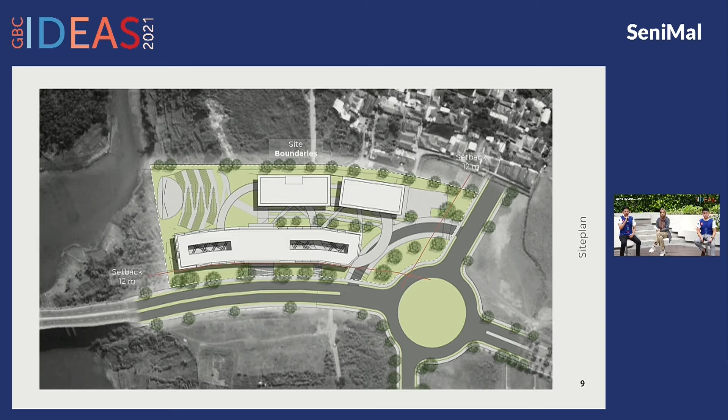Next, please. This is the basic site plan of the design. As you can see, the design has a very minimal entrance for motorized vehicles, seen on the furthest right side, where there's only one single loop functioning as a drop-off, whereas everything else can only be reached by pedestrians via walkways. Next. This is the project data. Next.

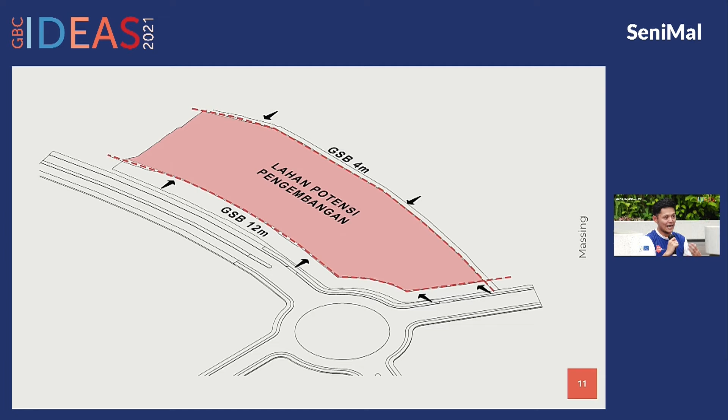So this is how we look into the design and how we develop it. First, we look at its setbacks from each side, and then we get a basic form for developing this design. Next. From there, we create two masses, one on its northern side and one on its southern side, where the shape is a response to the sun path.

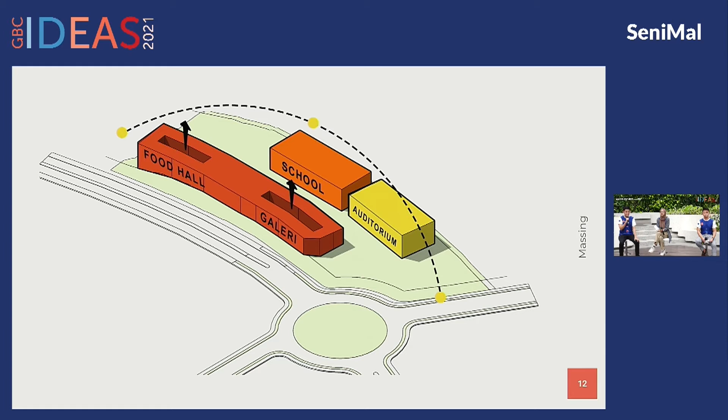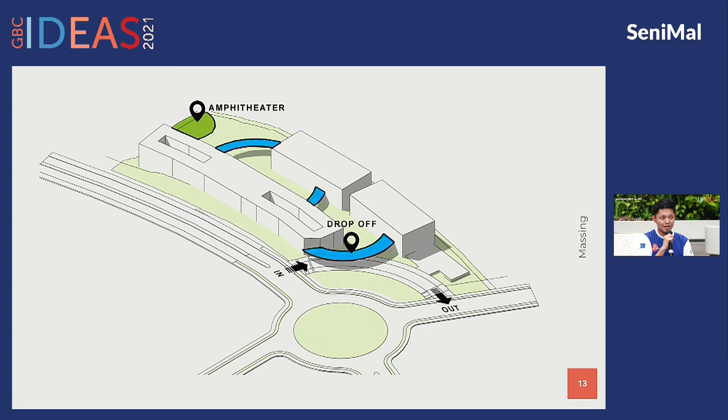Next. On top of that, we create a connection by presenting a drop-off that also functions as a sky bridge connecting the southern and northern buildings, as well as providing an outdoor amphitheater on the furthest western side. Next. And we get our final design, which roughly looks like this. Next. For its program, as said before, it mainly consists of public, office, exhibition, educational, and commercial, where the southern building is mainly used for public, whereas the northern side is used for semi-private or educational purposes. Next.

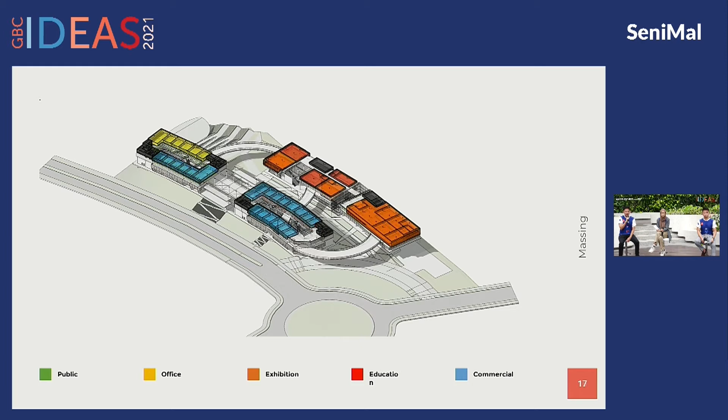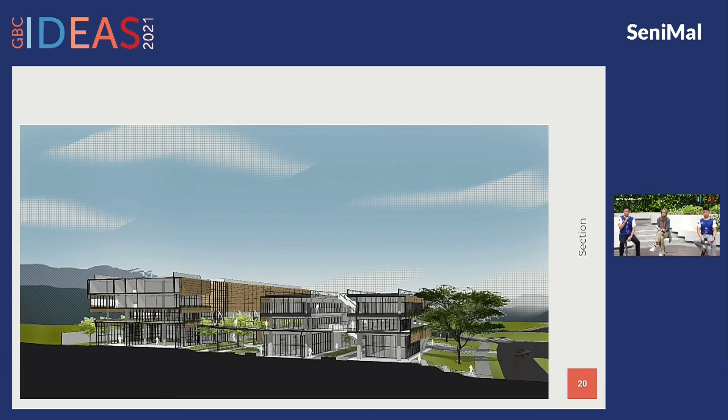As you can see, it's also implemented in the other section, where the northern side of the building is slightly higher than the southern side. And because of its mass, we also provide a single void in the middle of the southern building to increase light as well as ventilation. Next.

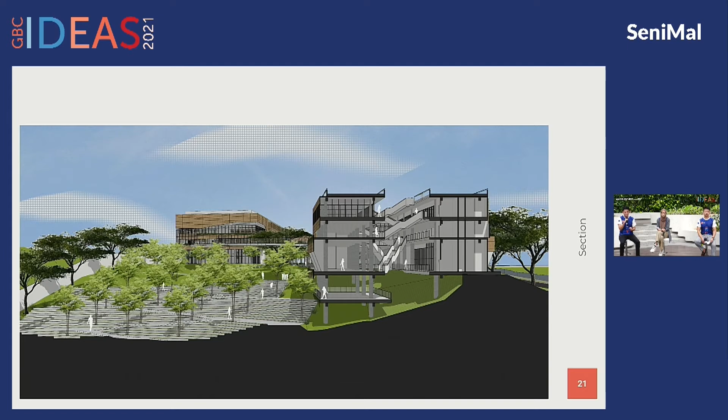This is also an overview of the amphitheater. On that topography, we add ramps as well as stairs to provide a landing for both pedestrians and disabled people who want to view it. As you can see on the southern side of the building, each level has an easy view towards the amphitheater, so even if there's an exhibition going on there, people in the building can also be part of it. Next. So these are the strategies. My friend will take over. Thank you.

And this is our strategies to enhance the design to reach the net zero energy healthy building. Next, maybe. Yeah, we have 5 strategies. At first, is massing. At the beginning, we do the placement and mass on the site oriented towards wind flow and solar path. And the second, we design the facade.

Implementation of building facade to maximize lighting and airflow. Then we choose low carbon footprint material, reducing material finishes and modular size application. And then we did active design through selection of low energy smart device. And the last one is, of course, renewable energy, utilization of abundant natural energy in Indonesia, such as wind and sunlight.

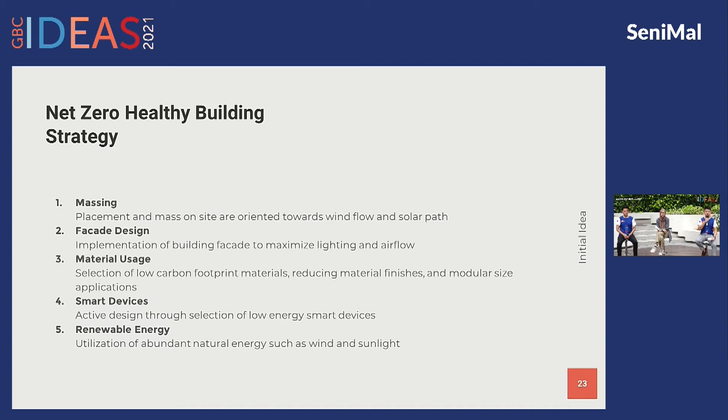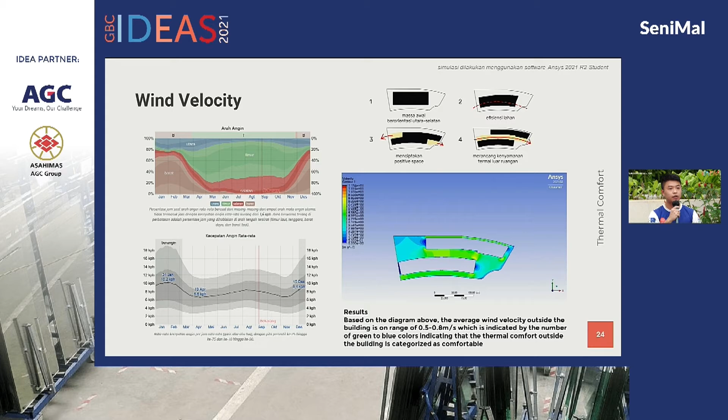Next. As you can see, this is wind velocity on the site. The average wind velocity outside the building is in the range 0.5 to 0.8 meter per second, which is indicated by the green to blue color, indicating that the thermal comfort outside the building is categorized as comfortable. Next. And then we did the facade design.

Padalarang has a climate that tends to be hot and humid, which encouraged the design of a facade that responds to the slope of the winter solstice and summer solstice, so that heat can be reduced and wind can be maximized to push humidity from the inside to the outside of the building. As you can see in the diagram on the right, winter solstice north, the altitude is 59.71 degrees, and the summer solstice south, altitude is 73.43 degrees. Next.

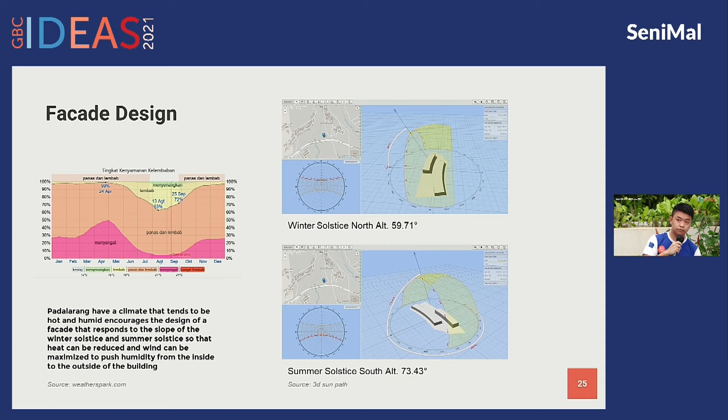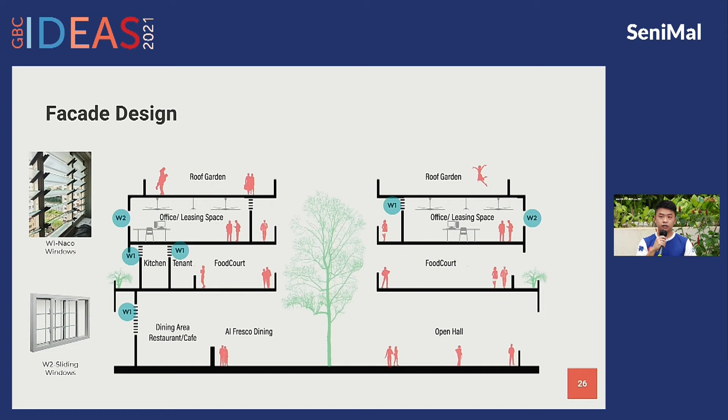As you can see at the section, most of the spaces are open, and certain spaces require enclosed space, like office, leasing space, kitchen and maybe library. We provide them with sufficient ventilation through Naco windows and sliding windows. And this is our wind velocity simulation inside the building. Based on the diagram, average wind velocity which passes through the building is in the range 0.56 to 1.2 meter per second. Next.

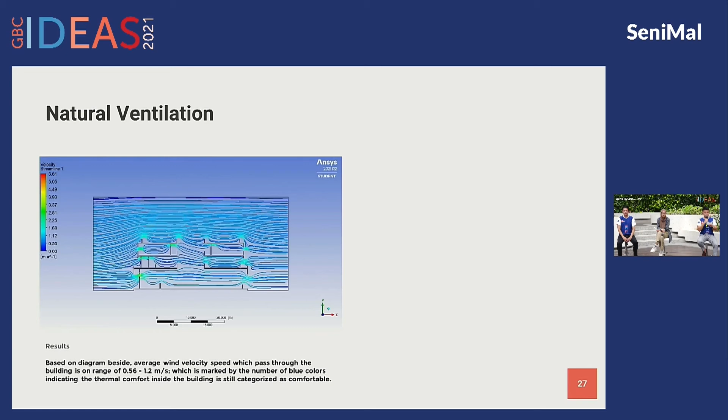From facade design, we did the simulation with a typical modular grid building, and within 8 a.m. to 4 p.m., average lux from daylight is about 260 lux, and it meets the requirement of most of the spaces, except certain spaces that require a high minimum lux level, like library, offices, kitchen, and handicraft room.

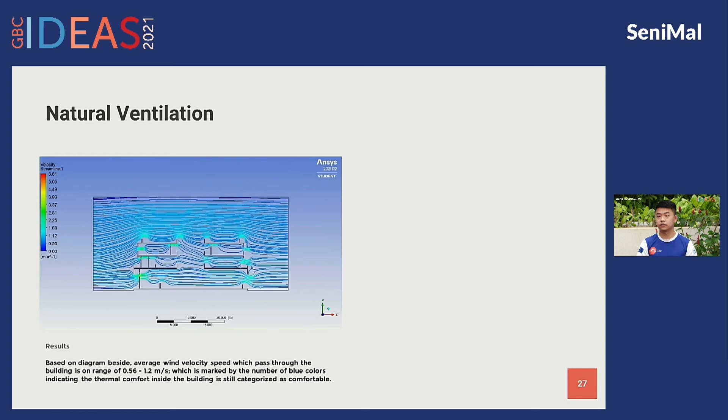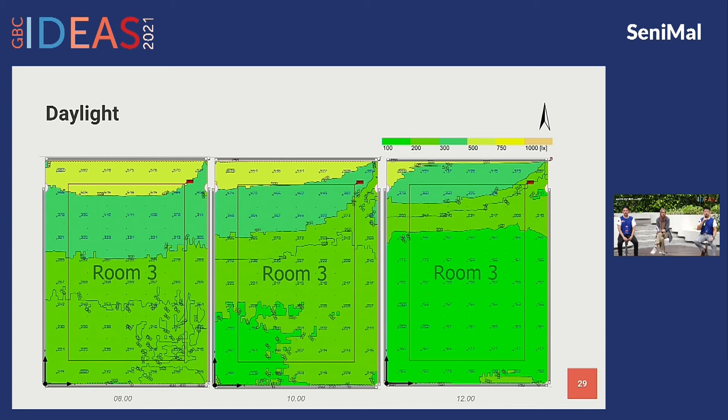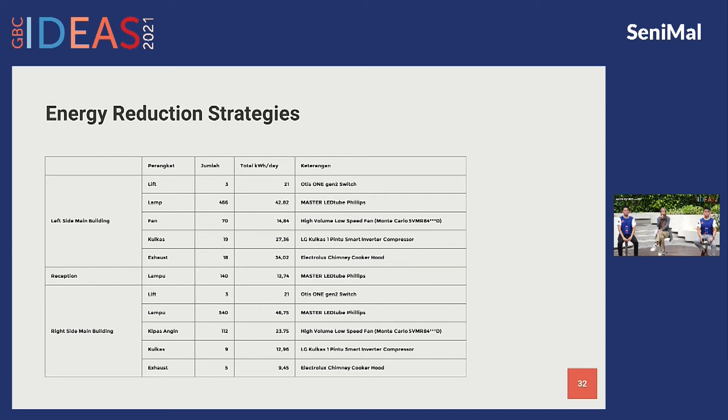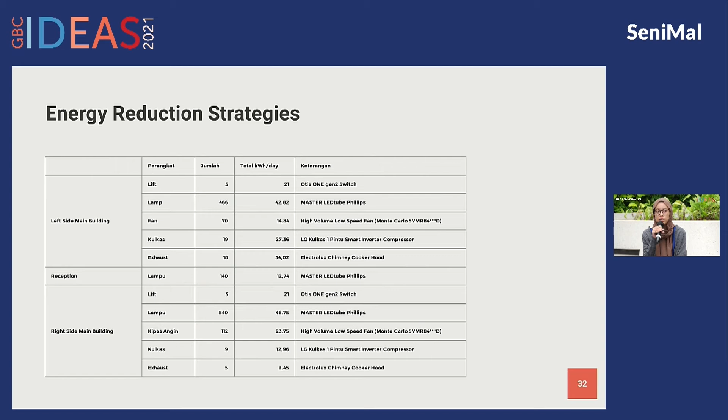So after we designed the passive design strategies, we maximize our energy efficiency by using smart device strategies. As we can see from the table, we try to specify each room's requirements, and then we use smart devices to accommodate the needs. As we can see from the site, the wind speed is low, so we achieve thermal comfort by using large low-speed fans, and we use air conditioners for specific rooms such as the recording room and auditorium, which need to use VRV as well. And next.

And for the lux requirements, we adjust by using the appropriate number of lamps so that it can support the activity of each room. And for the vertical circulation, SeniMal uses stairs as its main vertical circulation, but we also provide energy efficient lifts for the disabled so that the design can be more inclusive. Adding up the energy from all the lists above, SeniMal building energy consumption is about 457 kilowatt hour per day. Next.

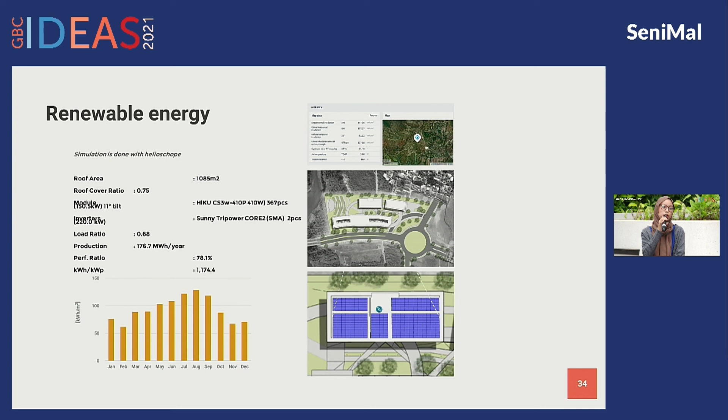To provide the energy requirements, we use solar energy, solar panels, as its alternative energy source. So we use HelioScope for the installation simulation, and we use the data from Global Atlas, and we iterate the degrees so that we can conclude that 11 degrees is the best degree to maximize its energy intake. From this renewable energy installation, we can have about 176.7 megawatt hour per year. Next.

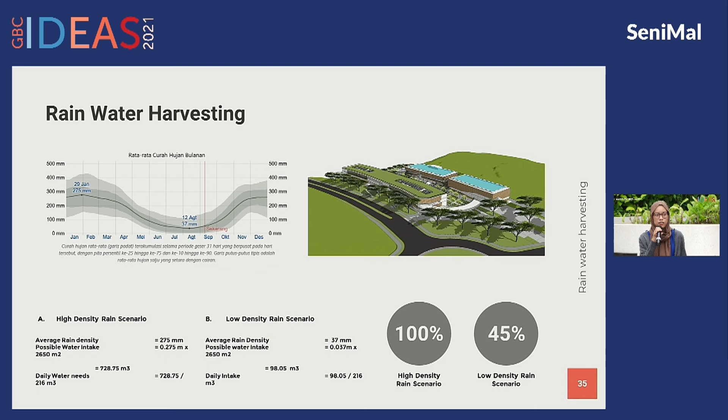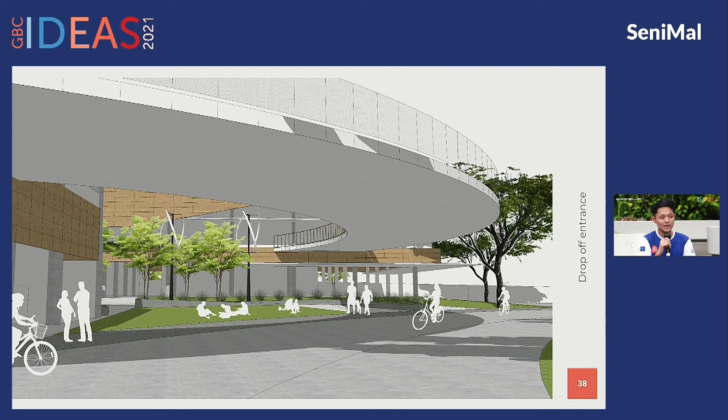Next. Okay, so from here, I guess we would like to look at the design expression. So next, please. For the first view here, we provide you the drop-off entrance, where the drop-off is actually in the form of a sky path or a skywalk. However, the form itself becomes a cover for the drop-off and therefore becomes an interaction space as well as an inviting space. Next.

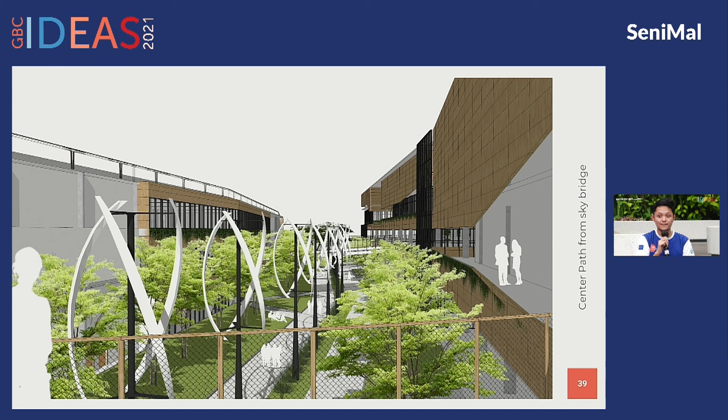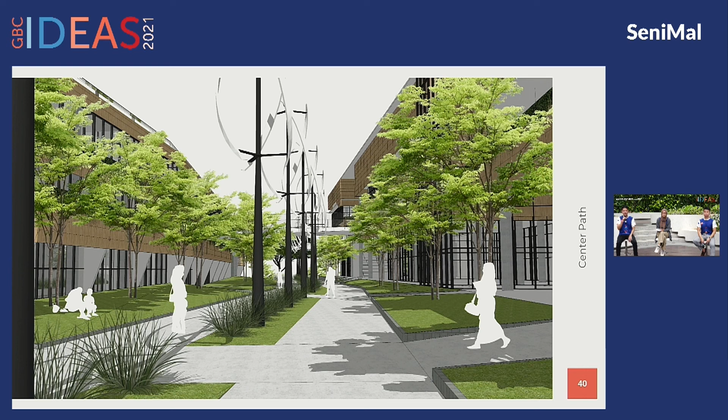From here, we can see from on top of that bridge that the middle corridor of the area is provided with lush vegetation as well as several vertical axis wind turbines, which can also provide some renewable energy to the design. Next. Okay, from here we can see from the pedestrian perspective how the integration of the lush design helps the pedestrian area become more inviting. Next.